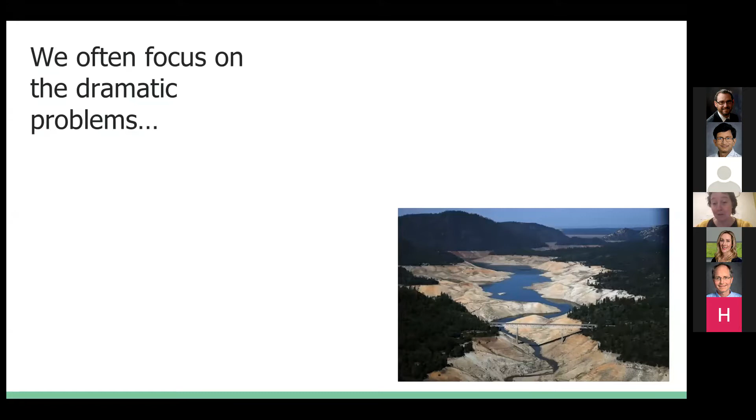In hydrology, particularly research hydrology, I think it's fair to say we are often interested in dramatic problems and large-scale issues, whether that be the shortages plaguing California at the moment, or extreme flow events - these are some images from Sydney in March, where they had extreme flooding.

What I want to talk with you about today are not the really big, consequential, catastrophic events, but rather some of the modelling practices still used for design of infrastructure that handles much smaller scale events. I hope the Berkeleyites will note there's a little shout out to some flooded underpasses in the Berkeley region.

I suspect everybody in Berkeley has their own favourite stories of stormwater infrastructure failing dramatically. My favourite was walking past Ohlone Park one morning and watching a literal fountain of water coming out of the storm drains.

But it's not only about infrastructure that may be undersized or may not cope with large flows - I also want to draw attention to situations where we get our infrastructure wrong in the opposite direction and really oversize what we're building. There are some examples from Perth, Western Australia, of oversized infrastructure that just isn't getting the flows for which it was designed and consequently doesn't function all that well.

There are a lot of reasons infrastructure will fail, and to some extent that failure is by design, in that we don't want to over-design our water infrastructure. There's also bad luck, there's also maintenance, but there are issues around whether the initial design is appropriate and fit to purpose, and the role that models still used for design might play in getting that right or wrong.

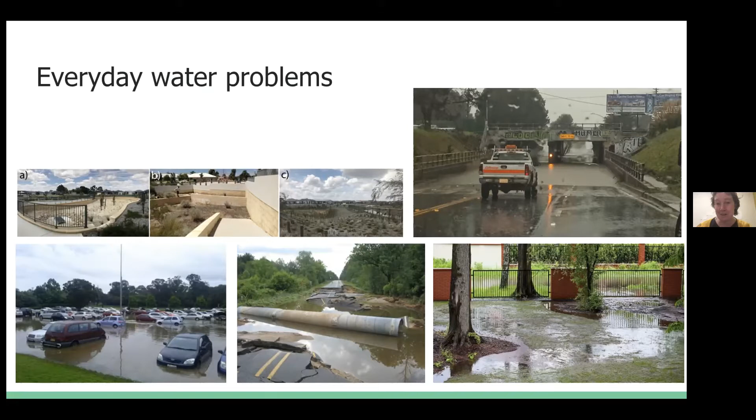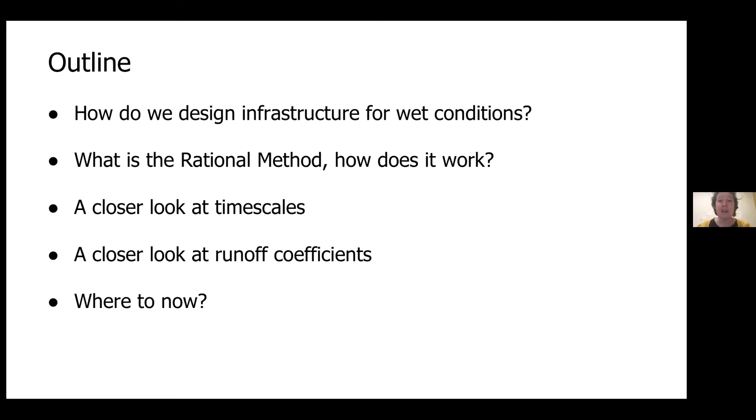So what I'm going to go through this morning is to remind everybody of the standard philosophy or approach to infrastructure design for wet conditions mostly. That pushes us towards the rational method, which is the method I'm going to tear to pieces this morning, and how it's supposed to work. Then we'll take a closer look at the timescales in the rational method and the runoff coefficients in the rational method, and then think about where that leaves the use of this method.

So, some background.

When we design for stormwater, we generally say we can't design infrastructure to remove the risk of flooding or the risk of failure. So our design target is not around the possibility of seeing the sort of event in this slide, but rather around how we modify the probability of seeing that sort of event.

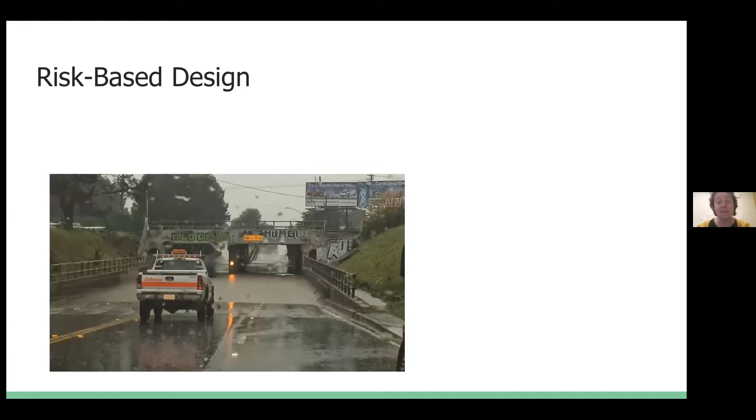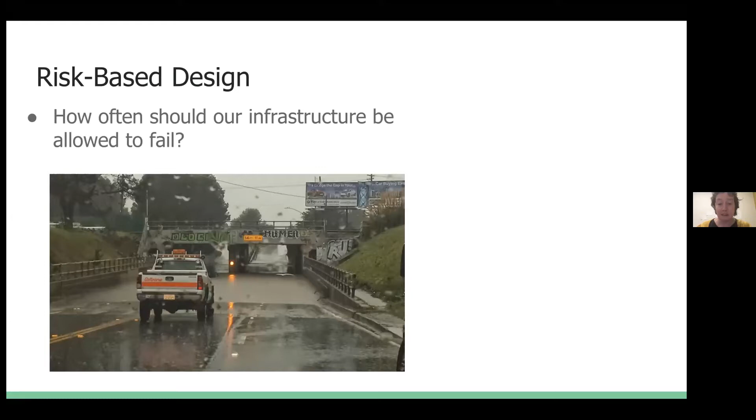So the first question we usually ask ourselves is, how often should our infrastructure be allowed to fail? We tend to answer that probabilistically with a frequency, or the inverse of a frequency, which most of us know as a return period.

Personally, I think this is the hardest part of any engineering design, because it's not really engineering that determines the return period, but some combination of social, economic, and ethical considerations. So it's really quite hard to say how often you should let things break down.

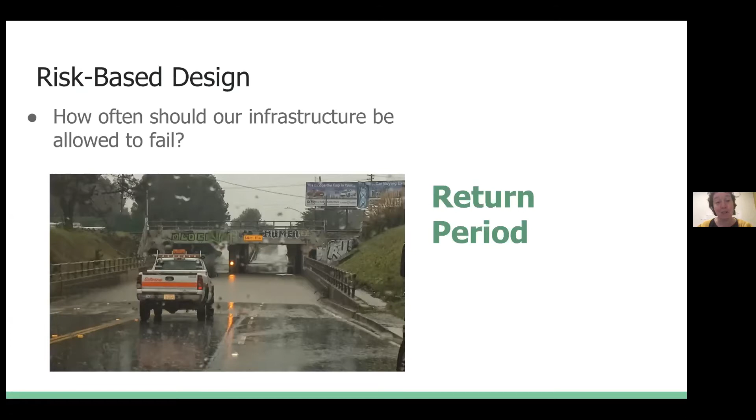But let's say we've made that decision, and we're ready to move on from the socio-economic and ethical stuff to do some hydrology. The question we want to ask, whether designing the culvert for Strawberry Creek at the bottom of Berkeley campus or some other piece of infrastructure, is what flow conditions do we expect our catchment to produce for that return period?

And from there, what flow properties do we need to accommodate with our infrastructure? We usually refer to this as the design flow, and it's really the key thing that informs subsequent engineering design criteria.

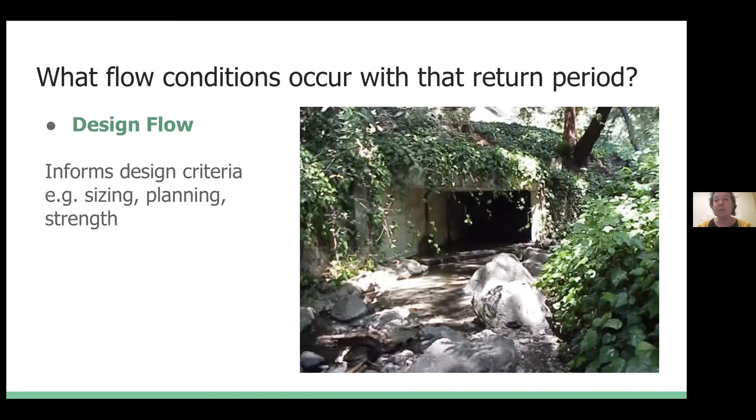This is problematic in itself, working out what our design flows are. What we're saying is our design flow is some function of our return period, and working out what that function is means we need to know about the probabilistic behaviour, ideally, of the flow.

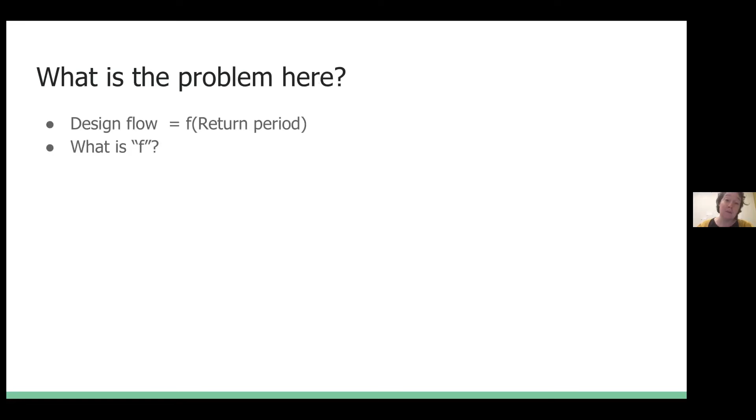Of course, the trouble is that in most places where we want to do this small scale engineering design, we don't monitor flow. So we don't have anything from which to base an empirical statistical approach.

So in general, what we'll do is turn to rainfall, which tends to be a little bit smoother through space, and more widely and continuously monitored over time.

One of the nice things about being in Australia is that we have very nice access to the Bureau of Meteorology data, and the ability to grab these intensity, frequency, duration curves that summarise a national consensus on the statistical behaviour of rainfall extremes across the country.

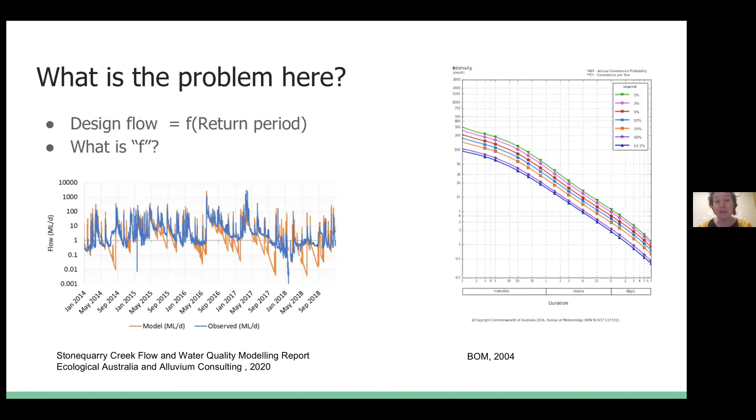So relating return periods to rainfall is usually the approach we take. And having done that, acknowledging there are many challenges with doing it well, particularly for high return periods, we then need to relate our rainfall to our flow.

This, of course, is where hydrologic models come into play, where we may also, if we're being sophisticated, take a second step and acknowledge that the return period of the flow is not necessarily the return period of the rain, bringing us to Monte Carlo type approaches in our models.

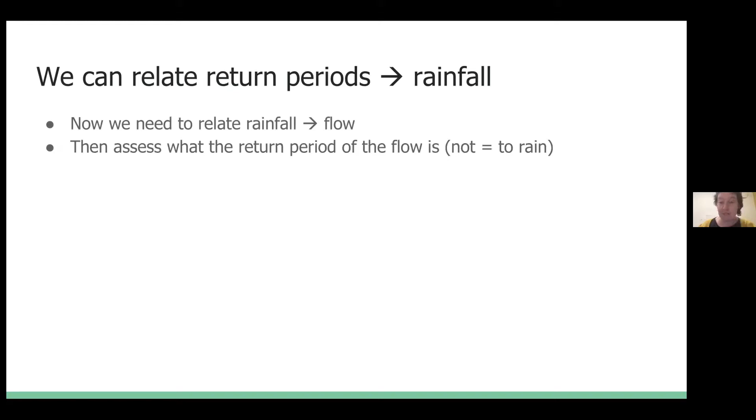What I want to lead with here is that there's obviously a zoo of hydrological models out there, and I have a suspicion that in a research modelling forum, many modelers are at the 3-dimensional or 2.5-dimensional, highly distributed end of the spectrum with lots of process resolution and complexity. But when thinking about practitioners, we much more often see them using lumped or semi-distributed models, which don't capture the heterogeneity of our land surface and processes with the same fidelity as the 3D models do.

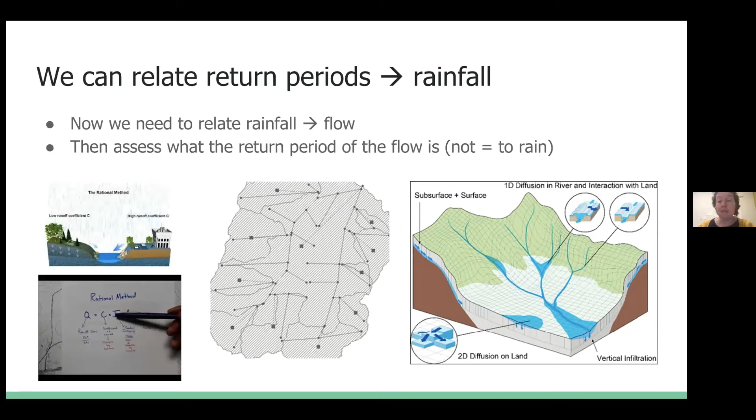It's still quite common in practice to find design being done with even pen and paper type models, like the rational method. And this very old, much maligned and yet very widely used method is what I'm going to keep talking with you about today.

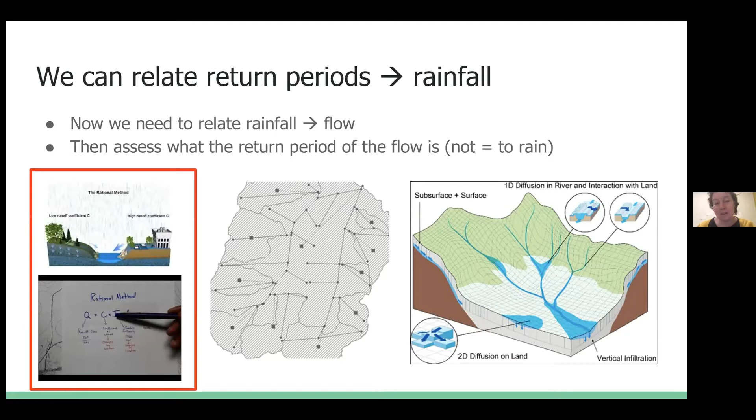It's a very silly thing to do research on as far as publication goes, because 90% of the research community says, oh, that old thing, who cares about that? And 90% of the practitioner community who uses it says, oh, don't touch our rational method.

To remind those of you who wouldn't go near the rational method if your life was dependent on it, this thing is a beautifully simple little equation where we say that our flow is proportional to the intensity of the rainfall, the catchment area, and some coefficient that we like to call a runoff coefficient. So you can immediately see the attraction of such a simple mathematical formula.

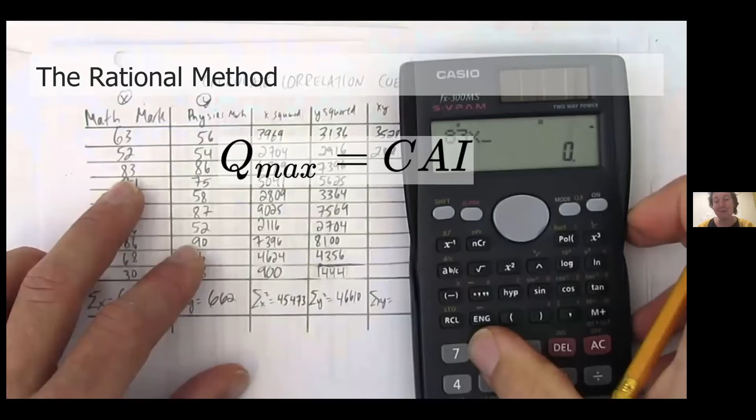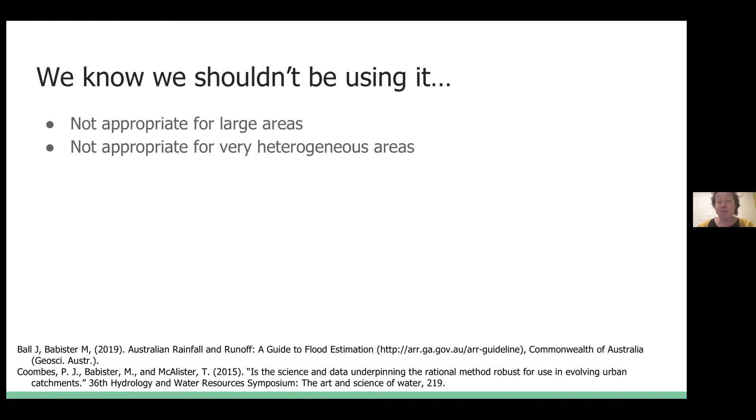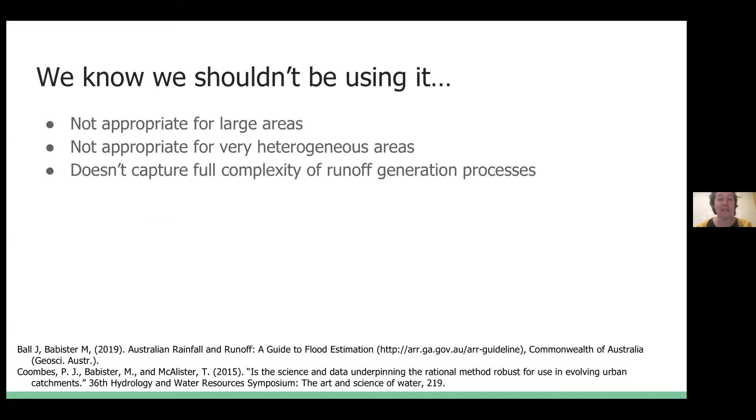We in hydrology know that this is a highly problematic method to be used. Issues with the rational method that are quite widely promulgated, and that hopefully you remember from your hydrology classes, are that it's not appropriate for large areas, that it's not appropriate for very heterogeneous areas, and that it really doesn't capture the full complexity of the runoff generation process. How could it? It's three little numbers multiplied together. So we know we shouldn't be using it, but we do use it.

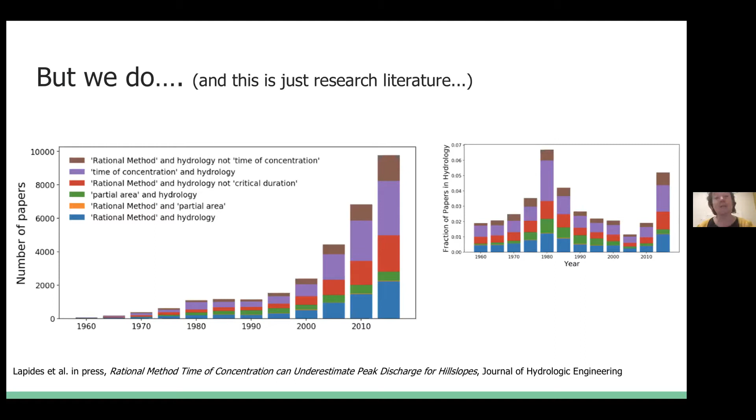On top of that, if we look into design practice, which is much harder to survey than the research literature, we find that the rational method is either supported, permitted, or actively recommended for use in design manuals all over the place. If we go to the Alameda County Design Manual, sticking with the Berkeley area, we'll see that the rational method is absolutely accepted as a way to design stormwater. Even here in Australia, where the Australian Rainfall and Runoff Handbook is one of the snootier publications or sets of design guidance, it grudgingly allows the use of the rational method. So it's certainly out there in practice and in the research literature.

So let's make sure that we're clear on this thing. The first thing I want to point out is that it's predicting some sort of flow, our design peak flow, and it turns out there's a lot of confusion about exactly what we mean by this design peak flow. That confusion is largely embedded with the definition and how we think about what this runoff coefficient is.

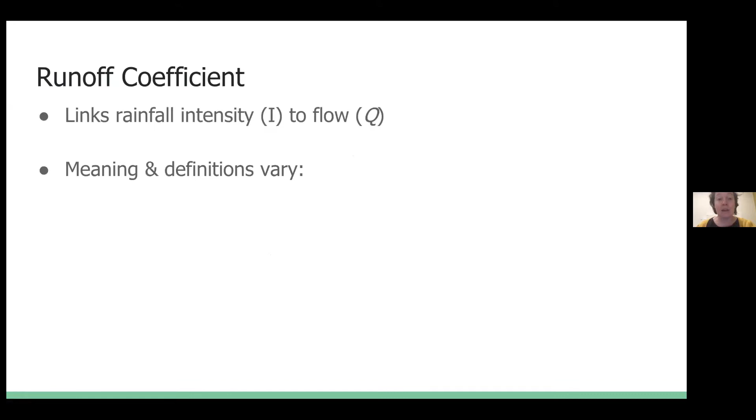Before I go any further, I want to go through the fact that there seem to be at least 3 different flavors or interpretations of the rational method that are out there, each of which gives you a different interpretation of what this runoff coefficient should be, most of which are thoroughly jumbled up in both design recommendations and the literature. If we have a look at this runoff coefficient, its job in this equation is to link rainfall intensity to flow, and we have these 3 flavors that exist.

The first of these is what you sometimes hear called the deterministic rational method. This was one of the original purposes of the method's development back in the 1800s, to deterministically make a prediction of a flow time series given a rainfall time series. As you start to think about that, you see many problems with it, including the fact that the runoff coefficient should vary within the storm and sometimes should take values greater than 1 and so on. But if we want to use it in this way, we would say that this runoff coefficient should be something like a ratio of the volume of flow produced to the rainfall volume that entered the catchment during the storm. We very rarely today see the deterministic rational method used. I think the last publication we found that used it was from 2005, but it's certainly an interpretation that exists.

The next definition of the rational method, which incidentally is the one that the Australian Rainfall and Runoff Handbook promotes, is sometimes called the stochastic or statistical rational method. This is a real fudge factor of a method, where what you're trying to do is produce an estimate of flow that has the same return period as the rainfall intensity you feed into the method. In that situation, your runoff coefficient really loses a direct physical interpretation and instead becomes a tuning parameter that tries to align the probability distributions of flow and rainfall. It's interesting that this is promoted in our design manuals, because although it's really appealing from a design point of view to say you know the flow with the return period you specified precisely, there are very few places, especially in urban environments, where you have anything like the data you'd need to work out what this runoff coefficient should be.

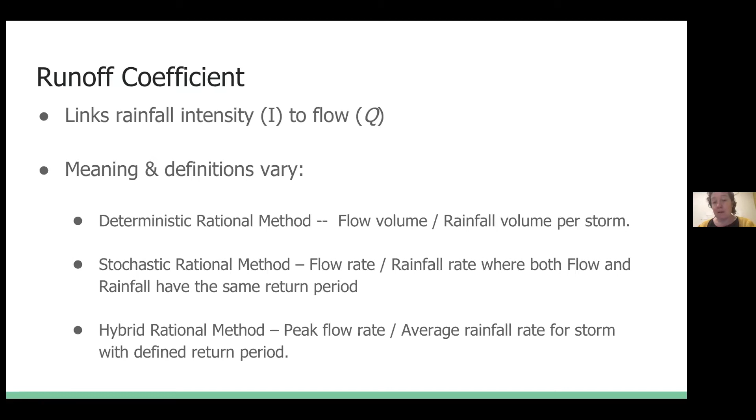There's very little out there that makes it clear that these three interpretations exist, so it takes a bit of digging and a lot of asking yourself if you have any idea what's going on to land on these definitions. But I think what's worth being aware of, if you're going to touch the rational method at all, is that these different definitions lead to quite different values of what the runoff coefficient would be in an ideal world. And more problematically, in practice and in research, these three methods are usually quite confused, or at least not distinct from each other.

We had a look at this as well. We looked at the 200 most recent research papers that involved the rational method, and 50% of them didn't specify what runoff coefficient they were using or what its intention was. Many of them conflated a mass balance sort of definition, which is appropriate for the deterministic flavour of things, with the peak flow prediction in the rational method, so they were mixing up their definitions. And of course, when you go to all these many tables out there of runoff coefficient, you don't see any notification of what is actually trying to be produced by that runoff coefficient. So this is already a real quagmire of people using this simple method, and quite what it means, and quite what numbers should go into it.

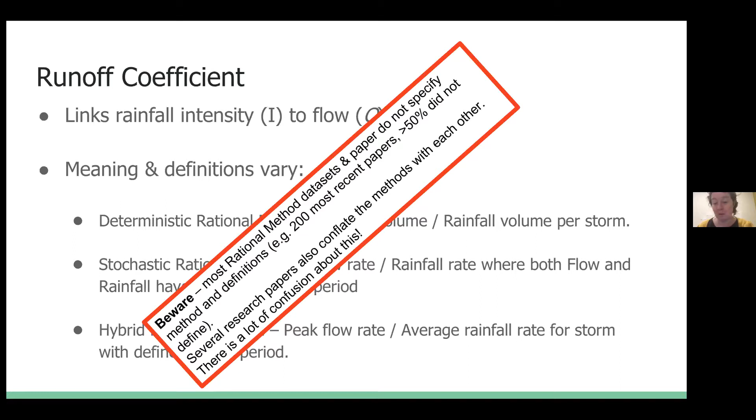For the sake of us not being embedded in that particular quagmire, because we have other marshy terrain to get into, I will spend the rest of this talk focused on this hybrid rational method. So if I'm talking about a flow rate, I mean the worst case, the highest possible flow that would be produced given the rainfall conditions, given the design rainfall.

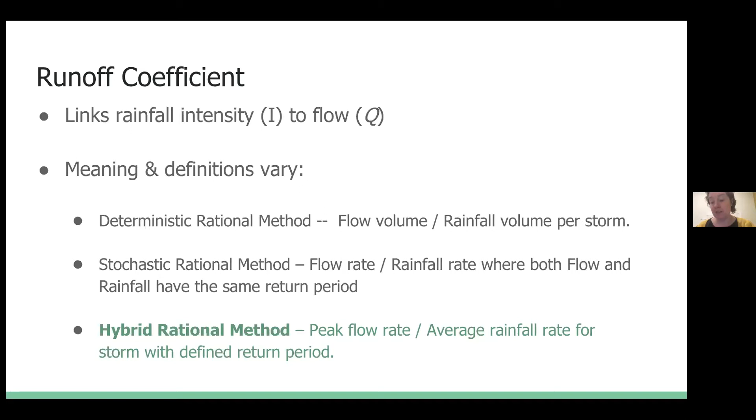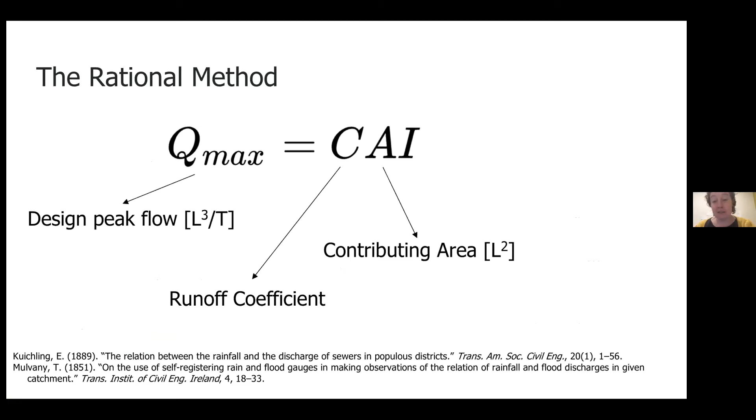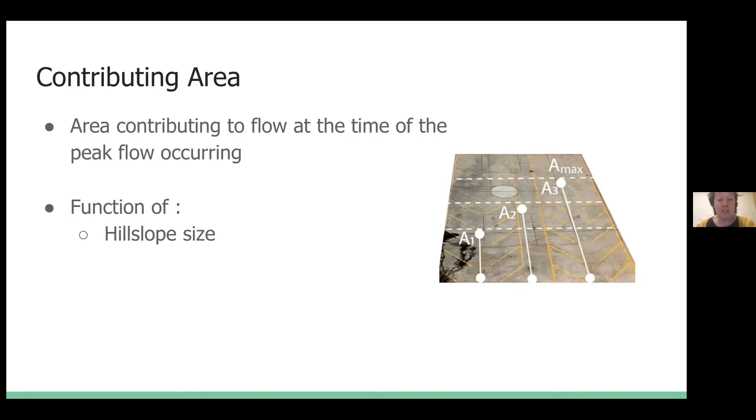With these definitions pinned down, since we'll look at the hybrid rational method, we then need to think about this contributing area. This gets us to the fact that as a storm progresses, we see different parts of the catchment area contributing to flow. Now, an assumption in the use of the rational method most of the time is that at the time peak flow occurs, you need all of your potential catchment area to be contributing. But in practice, you can have complex shapes to your catchments that may invalidate that assumption. So overall, we start seeing that our contributing area is going to be some function of the hill slope size, the storm intensity and duration, and we need to think about landscape shape. Land cover can also come into this, but I won't dwell on that today.

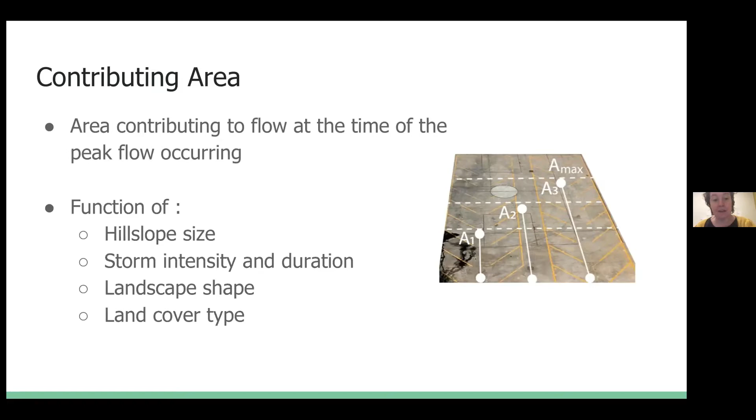Last of all, we need to specify our design storm intensity. And here we need to summarise our rainfall for our given return period.

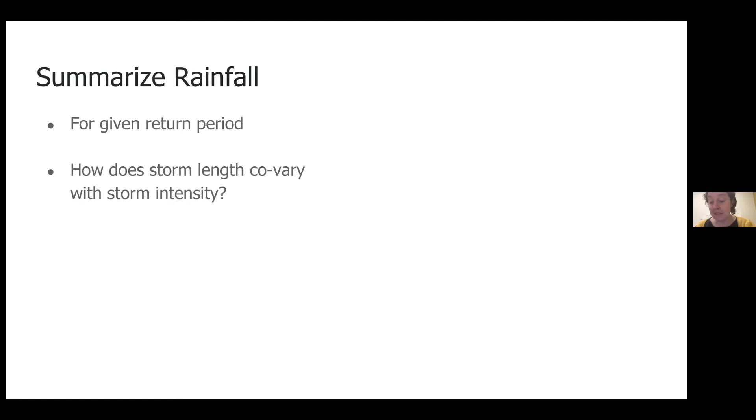Again, this is nicely mapped in Australia. It's also quite accessible in the United States, often at the state level. And what we've been doing, since we're moving towards an optimization here, is leaning on some of Demetris Koutsoyiannis's work to summarize the intensity frequency curve as a ratio between two functions that specify how rainfall intensity varies as storms become more or less frequent, and also as the storm duration progresses.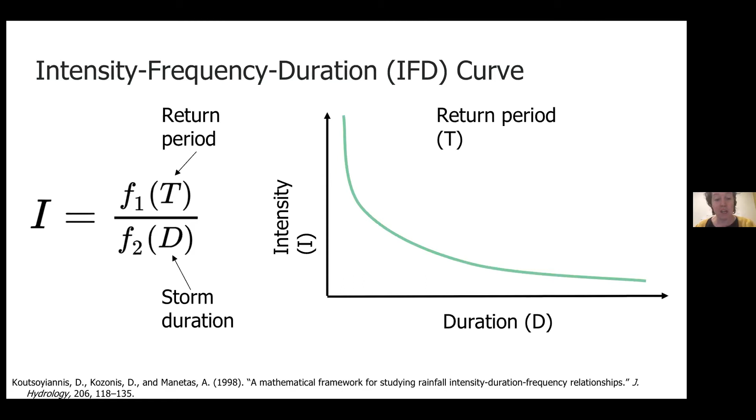So getting out of the logarithmic scales we saw in those Australian IFD curves, we'd see that this relationship between intensity and duration has a concave up shape. What we're asking is, where along this curve do we need to apply the rational method? We need it to be at the place where we get the greatest flow. Traditionally, we've assumed this will occur at the time of concentration, the shortest storm duration at which 100% of the catchment area would contribute flow. This is the conventional approximation embedded in design recommendations and standard application of this methodology.

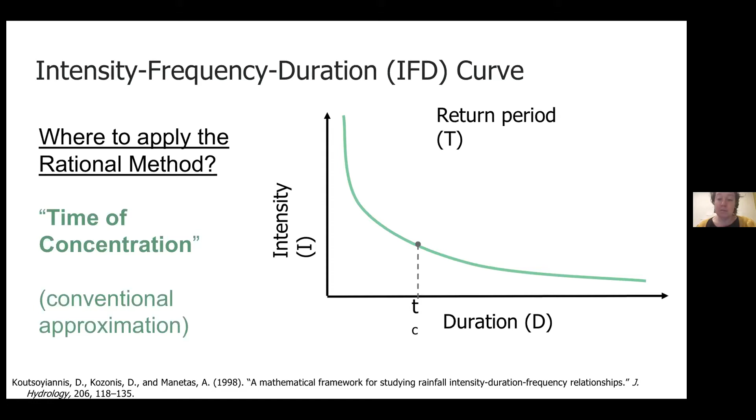So time of concentration is in there somewhere. Now, this time of concentration is defined as the travel time from the furthest point in the catchment to the outlet. It's widely acknowledged that this is another of the big problems with the rational method, it's bloody hard to estimate what this time of concentration is meaningfully in any real catchment.

There's some very disturbing pieces of work that have taken all the design recommendations they could find for equations for the time of concentration and applied them to large numbers of catchments, and just found orders of magnitude variation in time of concentration estimates—500% type variations across watersheds, across equations for the same watershed.

I'm not going to deal with that. I'm going to assume I'm working in a perfectly prescribed model space where I can know what the time of concentration is perfectly. But we need to acknowledge this is another of the issues with this methodology.

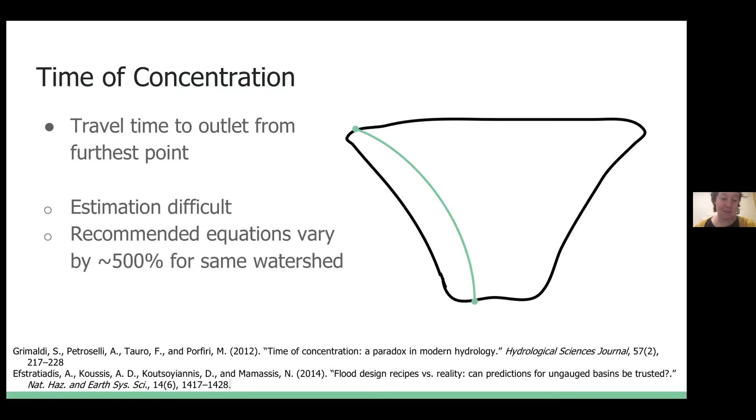So what I think is more problematic than finding a good equation for the time of concentration is to ask whether this assumption—that the time of concentration will always be the time that produces the maximum flow—is a correct assumption.

This is a question that was put to me the first time I started teaching hydrology at Berkeley, and I hadn't thought about it particularly well before. So let's pause and acknowledge Sheila, the student in the class who asked this very good question. We came back to this question from hydrology class in the studies I'm talking about here.

So what we've wanted to do is relax the idea of where we get the peak flow, and say that there is some duration along this intensity duration curve that gives us that peak flow. Let's call that the critical duration, which may or may not be equal to the time of concentration. Obviously, finding what this critical duration would be is an optimization.

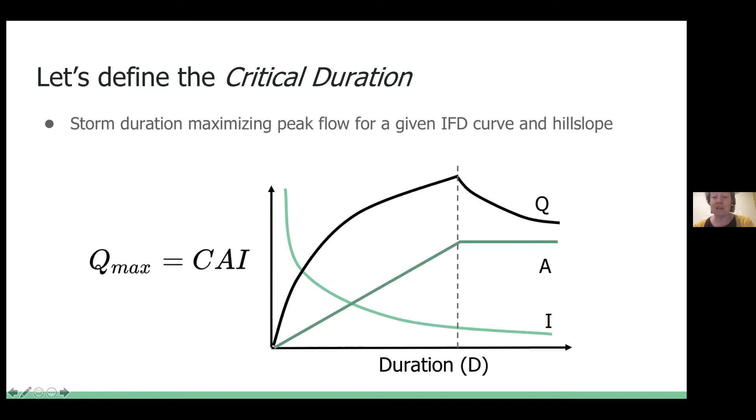So we can look at how the contributing area is changing with storm duration, and that gives us the dark green piecewise linear curve there. It's not necessarily truly piecewise linear, but if we assume runoff velocities are constant—not correct, but not too bad—then we get this piecewise linear thing. Then we've got our declining intensity duration curve, and we look at their product and ask, where is this product maximized? That's giving us this critical duration.

So our question really is, are these things the same? Is the time of concentration—the travel time to the outlet from the furthest point in the catchment—coincident with the critical duration that maximizes this peak flow?

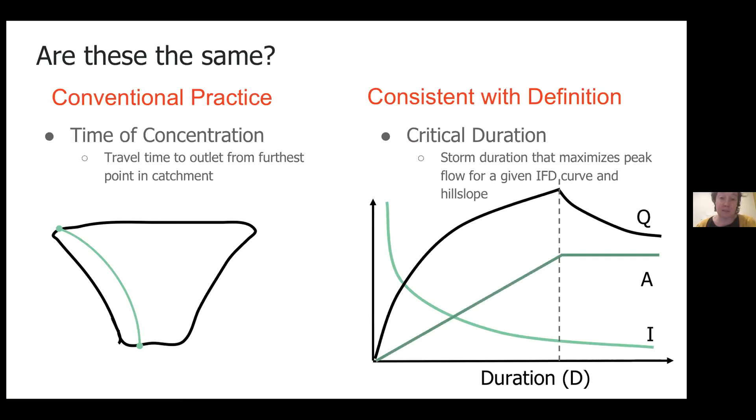And this is a valid research question to ask. And of course, the answer is no, not necessarily. I'll illustrate this with one case study around topographically non-planar hill slopes.

So we asked ourselves, how might hill slope shape affect this coincidence or lack thereof? And what we've compared are planar hill slopes, like a parking lot or an airport, or quite what we've got there in concrete, at the top, with either divergent or convergent hill slopes with some curvature on the bottom.

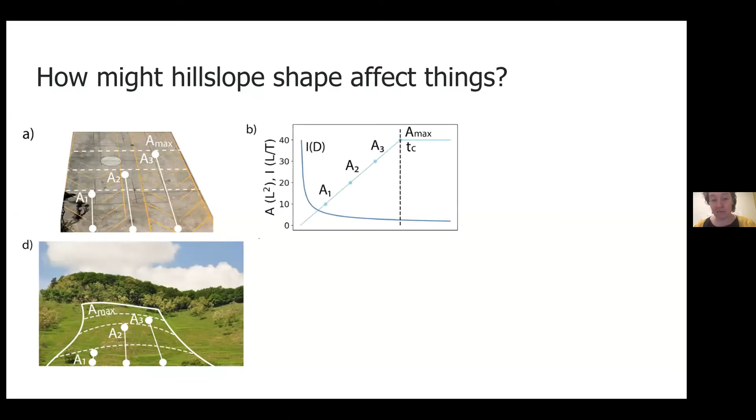And so if we go to this top case, again, we've drawn a picture that assumes a constant velocity, but if we allow for something more kinematic wave equationing, it doesn't actually change the result. In this situation, we do in fact find that the time of concentration is the critical duration, and we can use standard rational method assumptions with no worries.

And this is really true across just about any shape of intensity duration curve that's in any way physically reasonable. On the other hand, what we often start to find, particularly with divergent hill slopes, such as this one at the bottom, is that as we allow the area to increase with increasing storm duration, we're adding on such small additional contributing area at the margin that our storm duration is extending and our intensities are dropping enormously, but we're not actually getting that much more flow contributed.

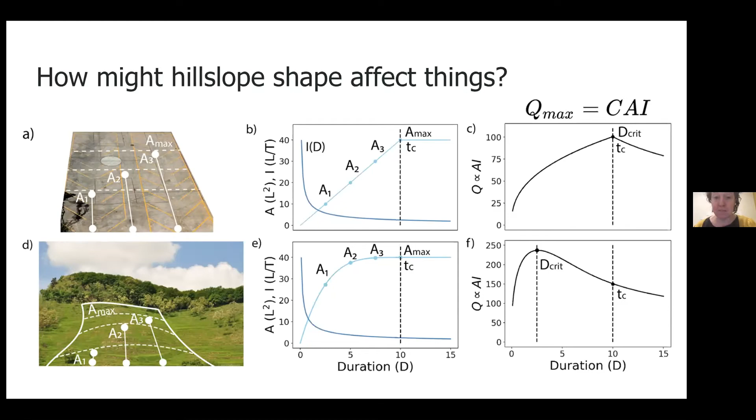And consequently, in these situations, we can start to see the critical duration diverge from the time of concentration. So the way that we dealt with this was to steal an idea from Peter Troch, who others will say maybe stole it from other people, and to represent hill slope curvature as a width function, and to allow that width function to vary exponentially up and down the hill slope.

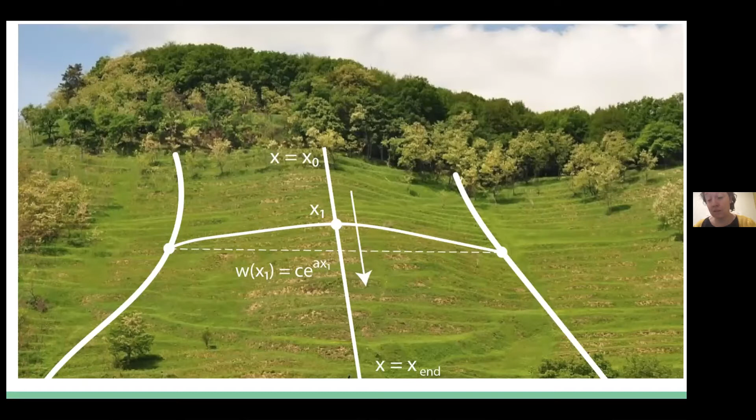And if we do that, we're able to represent our curved hill slopes mostly by tuning the value of this A, which is sitting in the exponent that's telling us how this width is varying. So broadly, we've got convergent hill slopes where A is less than 0, and divergent hill slopes where A is greater than 0. And these are just plots of how that width then varies with distance from divide.

I don't like to present mathematics or derivations in talks, so I'll just say that we do some maths. But if we take these hill slope width approximations and merge them with a kinematic wave equation for overland flow, what we're able to do is come out with analytical expressions for both the time of concentration and for the contributing area as a function of storm duration. And this lets us make analytical optimizations for the critical duration.

And I'll just give you a quick aside as to why we believe this bit of mathematics and model derivation for curved hill slopes, which, and this is just because it was fun, when you start designing your equations around really idealized mathematical shapes, you can of course go and make those shapes in the lab.

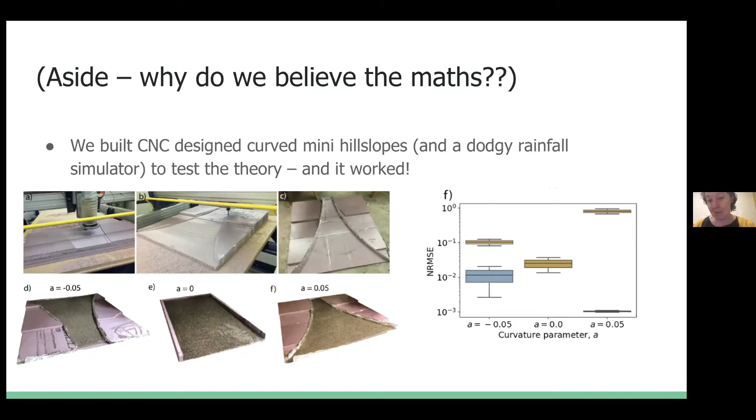With this mathematical approach, what we can start to do is ask what happens to the time of concentration and the critical duration as we take hill slopes with otherwise fixed area and fixed rainfall and change only the curvature.

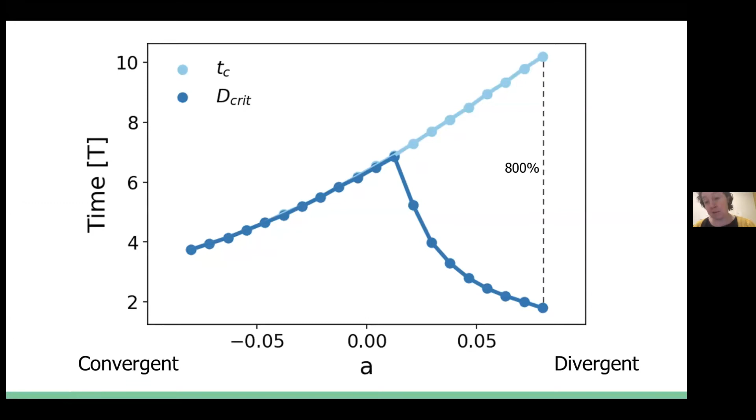And what we find is that once we get a little bit past planar and our hill slopes start to become slightly divergent, we get this big drop off between the critical duration and the time of concentration. And if we push that through the other assumptions in the rational method, we can relate that to differences in the contributing area at the time of concentration versus the contributing area at the critical duration.

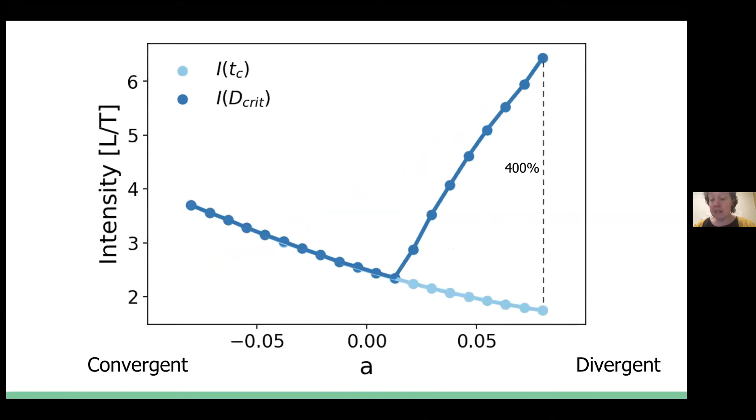We can do the same thing with the intensity, and then we can put them all together and ask what this means for the errors we'd get in our discharge if we use the conventional rational method versus an optimized rational method where we work out the critical duration. This tells us that in this case study on divergent slopes, errors in your design flow could be as large as 200% because of the assumption baked into the rational method that starts to fail given this hill slope morphology.

I should emphasize that all of this has been done in situations that are otherwise well behaved as far as the rational method is concerned. This has all been done for non-infiltrating hill slopes on which the kinematic wave equation applies, and small hill slopes — I think the overall area Danny used was a square kilometer. So this is very much still in the range of things for which the rational method is recommended for use.

What we can then start to do is extend that over a bunch of different return intervals and rainfall situations, and ask, do we at least constrain our uncertainty by using the rational method? It's quite hard to generalize this.

What we've generalized are the ratios between the area at the time of concentration and the area at the critical duration, and the same thing for the rainfall intensity, taking these ranges based on plugging realistic numbers into our equations. Really, what we take home from this is that using the rational method does not offer a good way to constrain the uncertainty.

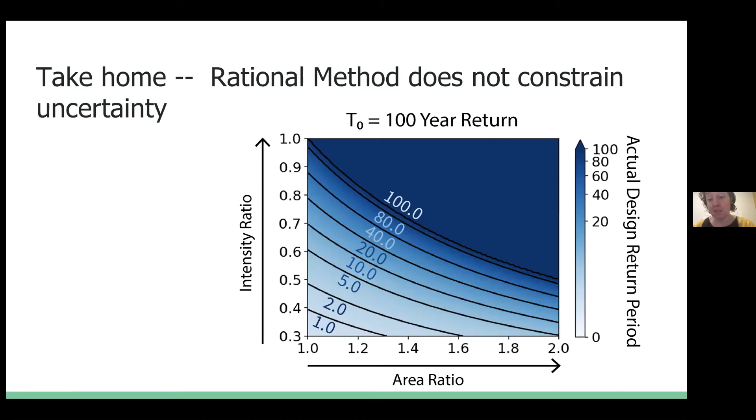So there's a good space where things work out, but there's also a lot of uncertainty and risk if you don't understand how this optimization is working. That's an illustration of how the timescales used in the conventional rational method can become problematic.

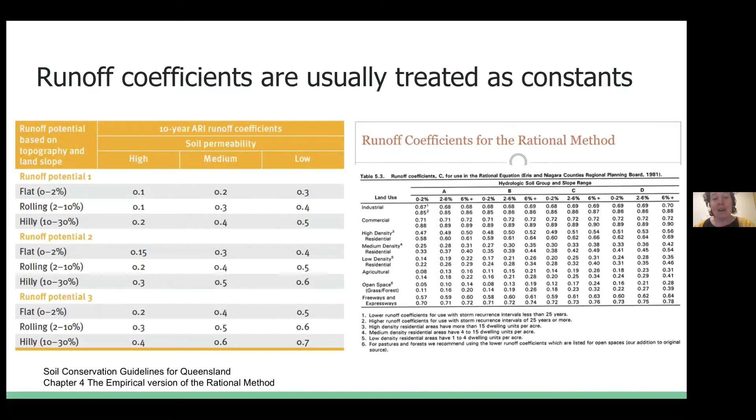A second problematic area is the runoff coefficient. Anybody who's taught or used the rational method will be familiar with how these runoff coefficients are usually treated as a constant. Anyone can jump on Google, type in 'rational method runoff coefficient,' and tables and tables of numbers between 0 and 1 will flood your way. These are just two examples, one from Queensland, one from New York State, to show it's all over the world.

When you start to think about this, it's strange. Why do I expect these numbers to be less than 1? Partly because I expect some water to be detained on the land surface — these so-called initial losses — but also because I expect some of my land surface is permeable and infiltration will take place.

The key thing about infiltration is that it's not a fixed thing, but continues over time. If we take the simplest, dumbest model for infiltration and say it's approximated as a constant rate about the same as the saturated hydraulic conductivity, then think about what happens with storm duration, we'd know that at equilibrium — when our whole catchment area is contributing — our flow rate would be given by the contributing area multiplying the rainfall intensity minus whatever that infiltration rate was.

So this would be for a homogeneous area. If we put that into the rational method, this must equal the peak flow rate, so this must equal the runoff coefficient multiplying the intensity multiplying the area. Quite immediately, we see that the most basic mass balance here requires that the runoff coefficient depend on intensity, which in turn requires that it depends on the storm duration.

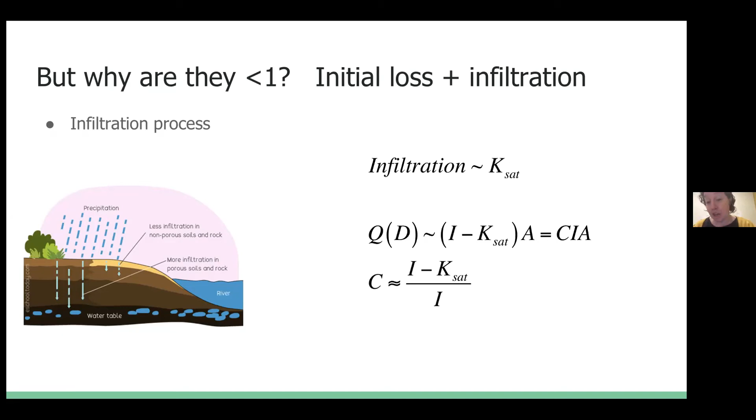Here's another area where the duration dependence of the things that matter inside the rational method is usually approximated over, so we thought this might be worthwhile investigating. We used a slightly less simplified version of an infiltration equation. We looked at a constant continuing loss assumption, but we said a more appropriate baseline case would be to use a Philip approximation so that we have some change in infiltration rate over time as well. At this stage, things rapidly start getting pretty ugly.

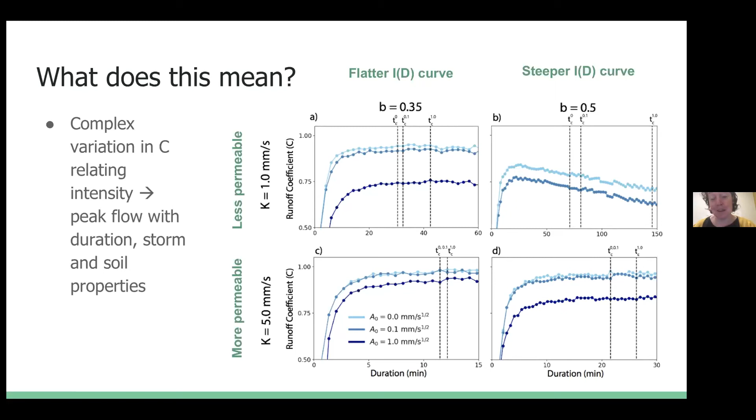So this is what's happening to these runoff coefficients in these simple models. The trouble now is that the fact you can have a runoff coefficient that varies over time interacts with the problem of optimizing the timescale on your storm, and you start to end up with many, many pathways towards not picking the true peak flow - if I say the truth in this case is given by Philip-like loss.

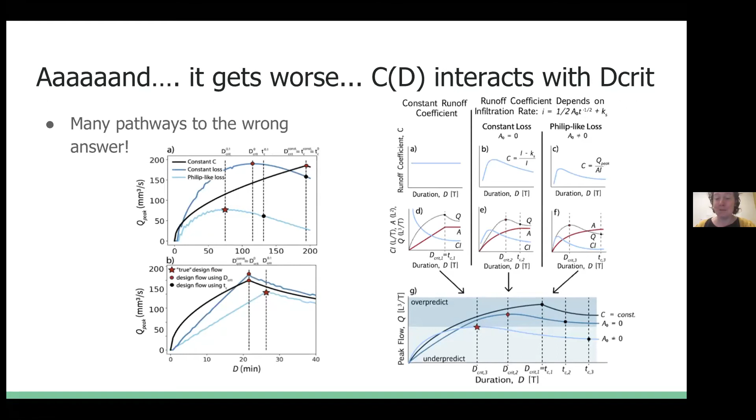Once again, we see that there's tremendous scope to think you're using this method correctly, to be using it in a situation that is supposedly really what's recommended for the rational method, and for these numbers to be way, way out because of what's baked into the method itself.

This is where I want to pause and say, well, hang on, a chunk of that was me showing that we can end up over-predicting our design storms, and we understand caring about under-prediction when everything floods. Here in Western Australia, we probably have the opposite problem most of the time, with people being pretty conservative and generally over-predicting flow. Like California, or like we think may happen in California, Western Australia is facing a drying climate likely to dry by another 15% or so over the next century, and we have very nonlinear responses of stream flow to reductions in rainfall.

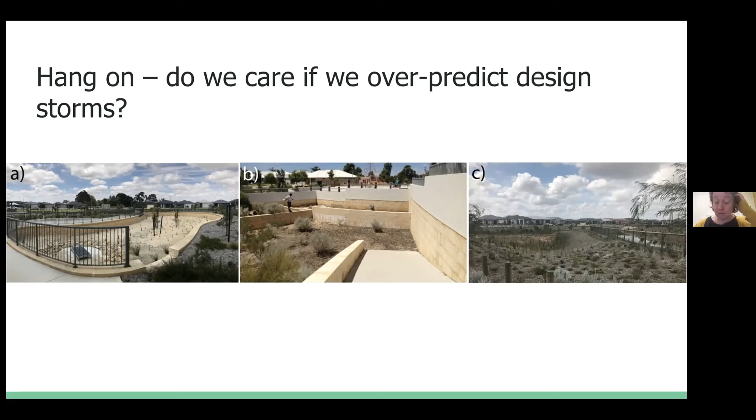We don't get the vegetation growing. So if we only think about flood control, maybe we're not so worried about oversizing or over-predicting our design storms. But when we start to think about things like water-sensitive urban design, it does become more problematic.

So we've been trying to help out a little around this problem, and at least around the curving slope problems, we've been working with Esri to add a new tool for Arc Hydro. Arc Hydro Hill Slope is in development and should be released fairly soon—we're just waiting on finalizing our papers so the product can come out alongside the publications. What this tool does is automate the analysis of hill slope curvature and relate that to the overland flow hydraulic properties.

So examples here, we've got one from Walnut Gulch and one from Reliez Creek in California. What we can see is a straight-up classification of the subwatersheds in these basins based on their curvature—are they headwater slopes, convergent, divergent, or more or less uniform?

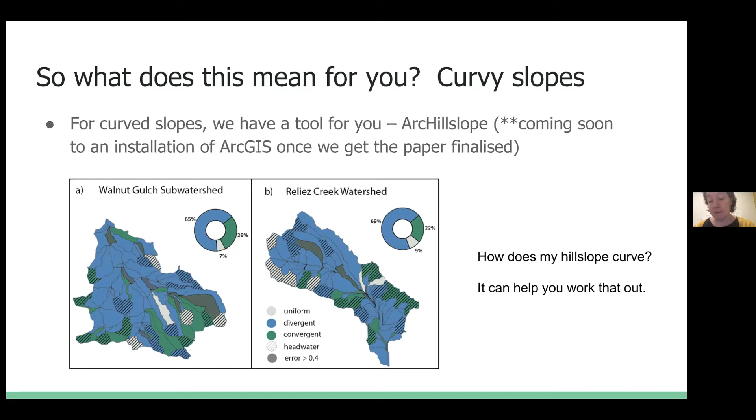Sometimes our tool doesn't do a very good job when you've got a very curvy stream channel going through the middle of your subwatershed, and you'll see some areas in dark grey where there's large error in applying the methodology. So it's not perfect, but it's not bad.

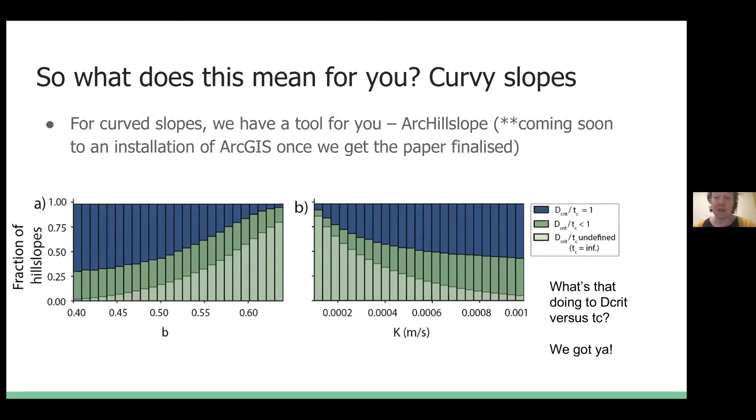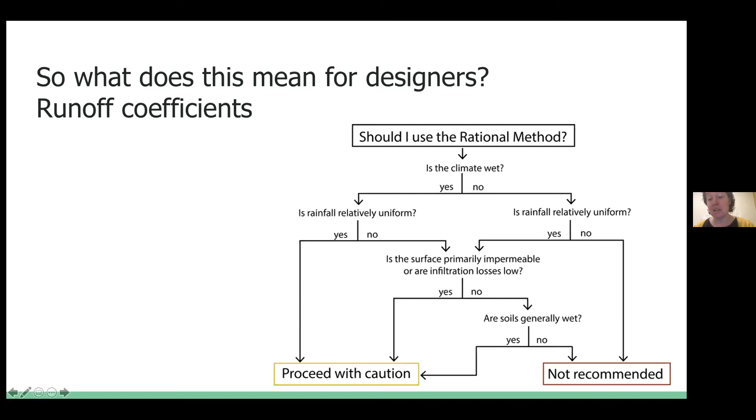If we're thinking about the runoff coefficient side of things, there's not really a good tool available to wade through that quagmire of problems. But we have tried to pull out a decision tree that asks users to think about climatic conditions, how rainfall changes as storms become longer or shorter, what's happening with permeability, and whether we'd normally be starting on dry or wet soils—making recommendations about maybe not using the rational method strongly in some situations, and only using it with caution in others.

The conclusion I'd really like to leave you with is that this little method looks really nice, and certainly is appealing to those who are nervous of more complex models. But of course, we know that hydrology, even on small slopes, is quite complex, and the rational method is quite simple. So making a simple method approximate the behavior of a complex system means deriving the numbers that go into it has to suck up all of that complexity, and that's really not straightforward. The whole situation leaves me pulling these kinds of faces.

I find this very challenging, because I know that the students who leave my hydrology classes will be expected in their workplace to know what this rational method thing is, and maybe expected to use it. But I don't want to contribute to promulgating its use any further. I think probably we need to cut this guy off right about now.

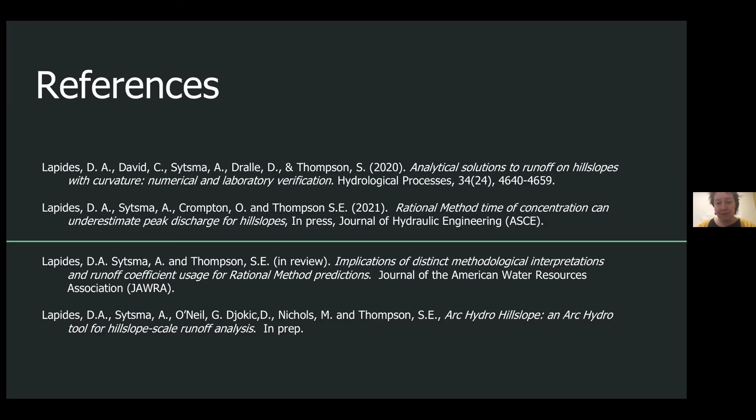So I've heard enough of me. You've probably heard enough of me too, and I'll stop.